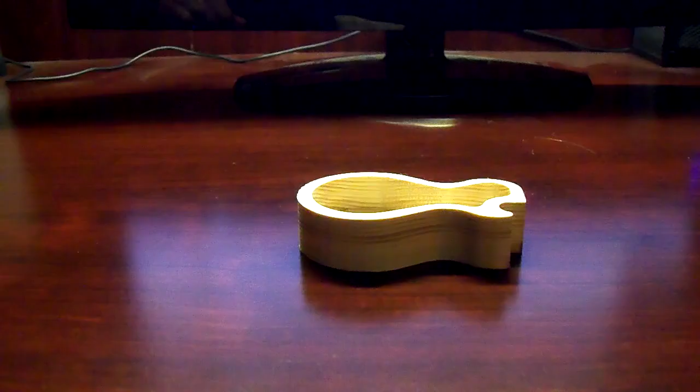I made this little guitar shaped tray the other day on my CNC router out of a piece of pine as a prototype. I want to make one a little bit larger out of a piece of walnut, just to use as a little tray to put parts in while I'm working on a guitar. Of course, it'll be larger than this. So I've got a piece of walnut I need to plane down, and then whatever thickness it is, we'll use that thickness to program the CNC for the depth of cut.

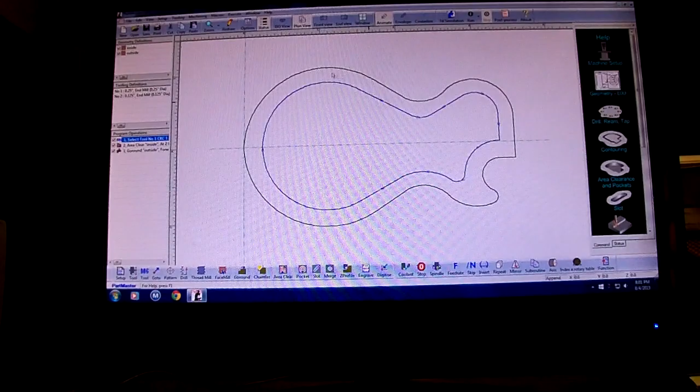Now that we've got the board planed down, we can set the depth of cuts. Board measured about 0.9, plus or minus a few thousandths. So we'll set the depth of the contour at 0.91, about 10 thousandths over. Make sure we cut through.

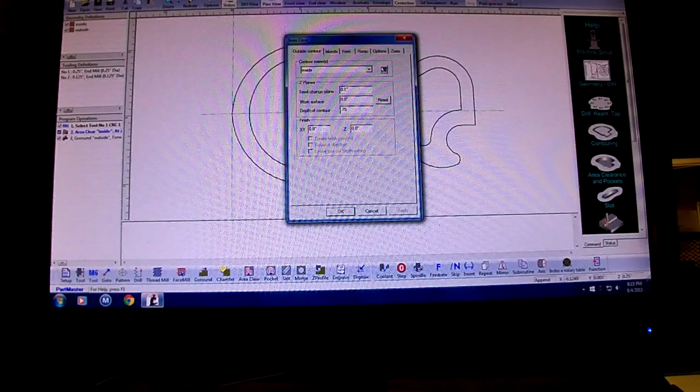And we're taking a little over an 1/8 inch cut at a time. To clear the inside, we'll make that about 0.75, 3/4 inch deep pocket cut. Again, a little over 1/8 of an inch cut at a time.

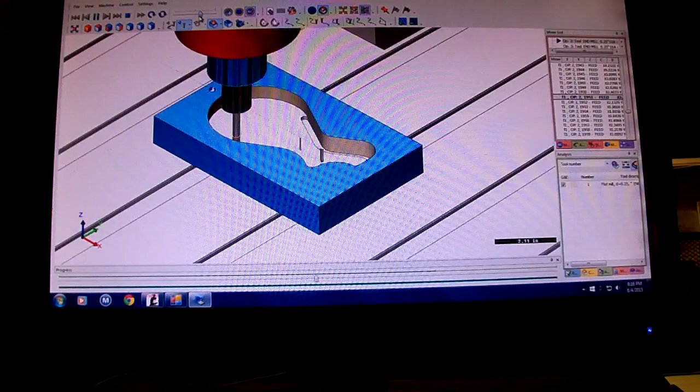We can do a little simulation to show how it's going to cut. We'll speed it up just a little bit so it won't take too long. Okay, it looks like it's going to cut pretty good.

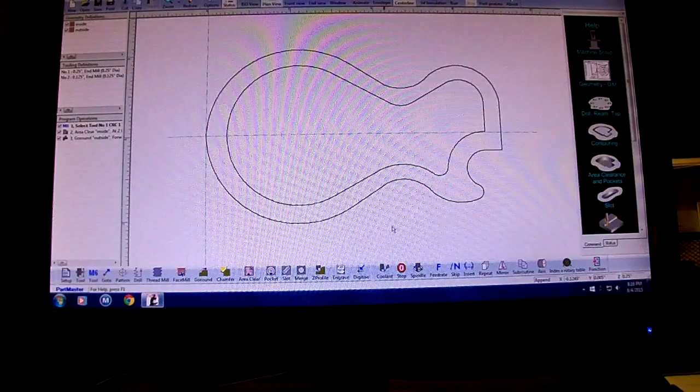So we can click post process and create the G code. And there it is, that quick. That's how quick it is. There's all your G code. We'll copy that onto a flash drive and take it to the CNC computer.

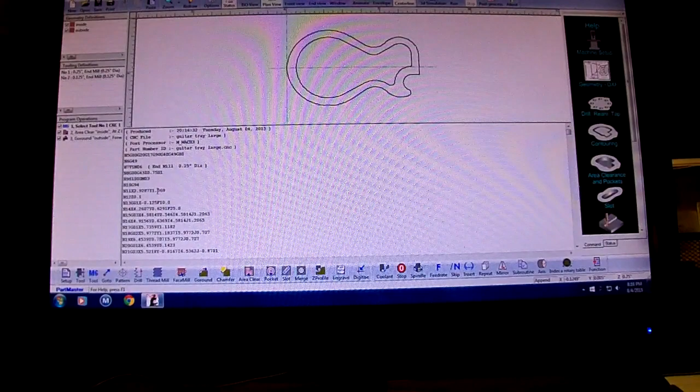Okay, I've got the G code loaded into the computer, and here's one of the pieces of walnut. I was going to use the vacuum hold down fixture to hold it down to CNC it, but when I was CNCing the little small pine one, it wanted to move a little bit on me. When I CNC'd some MDF before, it would hold it pretty good, but the hardwood and softwood like pine and walnut for some reason seems to be a little slicker, and it would hold it down, but it would slide.

So what I did with the little pine one, I sprayed a little spray adhesive on it, and that helped hold it down. So I thought what I would do was try something for the large one with a rubber gasket around it. So I cut a groove into this that would sit over the existing holes in the fixture, and glued this gasket in, thinking that might help seal it. But I think I used some super glue to help hold it in there, and I got some on the top, so it's kind of hard, so it may have lost some of its rubberness, and it still wanted to slide a little bit.

So what I think I'm going to do, I just screwed a board down on top of the fixture, and I'm just going to use that, and I think I'm going to try some double-sided tape and use that to hold it down and see how that works.

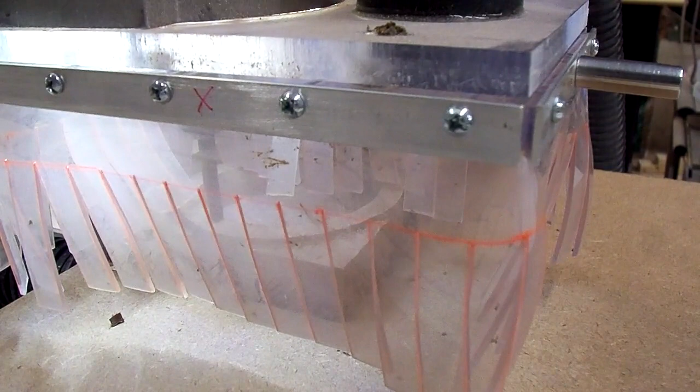Well, there it is. Let's see what it looks like. I think I've got to get a putty knife to pry that up. Well, that doesn't look too bad. A little bit of pull where the grain changes directions. All in all, not too bad.

I'll get the double-sided tape peeled off the bottom, sand it up a little bit, break these edges, and probably put a couple coats of lacquer on it, and then be ready to use.